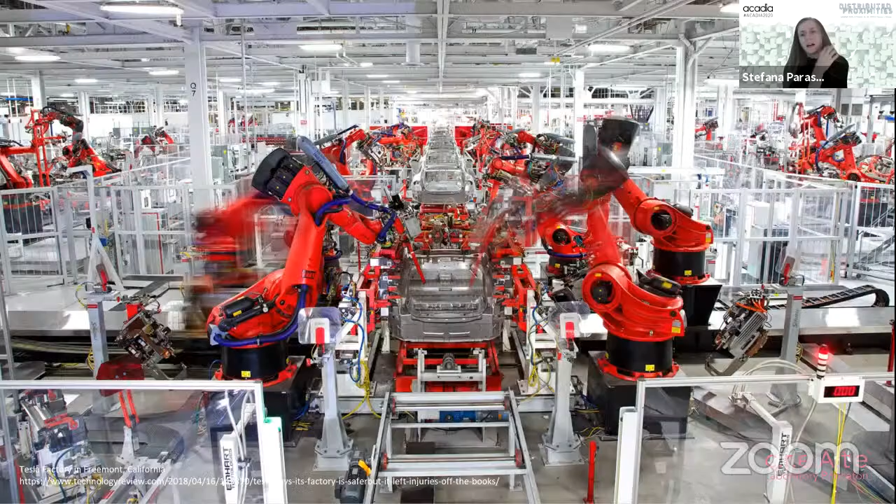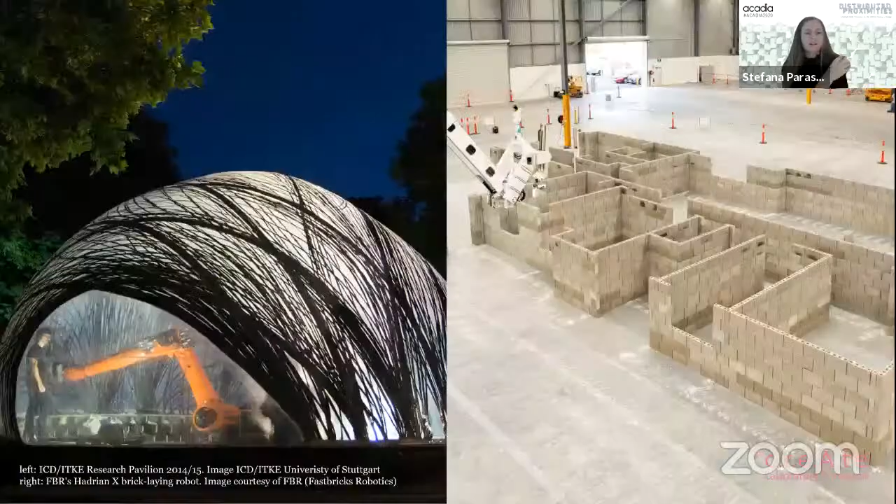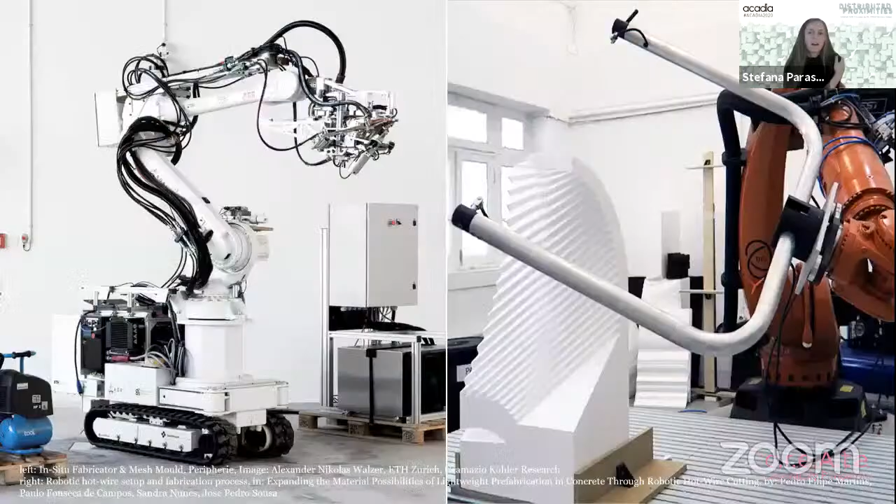Digital technologies have strongly impacted many industries, making processes more material efficient, cost efficient, and safer. However, in architecture we see quite some disparities in this digitalization process. Research is often focused on fabricating non-standard geometries, while on the other end of the spectrum, digital tools are mostly used to automate existing and standard processes, which leads the architect to assume one of two opposing roles: either becoming a specialist in a very narrow technical area, or being an end user relying on pre-existing processes and tools.

This leads to tensions even within our own discipline over the value of such technological development compared to the value of creativity and critical thinking. And while the technical architectural field may often feel closer to engineering than the humanities, I think we are in a very unique position that allows us to reflect upon the implications of technical tools in design.

But I am convinced that we can't do this without a very deep and thorough understanding of the underlying technical details. I think only by engaging with technology to the fullest and embracing the challenges of entering completely foreign disciplines are we able to advance these to benefit our own field and guide technological innovation towards what we really need, instead of relying on other fields to develop the tools we'd like to have.

I'd like to take you through about 2.5 projects of mine to showcase the types of developments that my students and I engage with from a technical perspective.

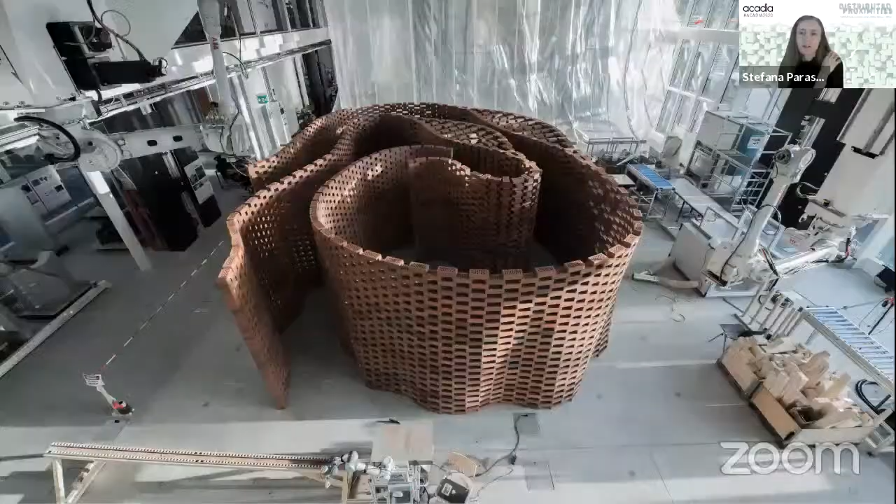The Brick Labyrinth was a teaching and research project developed together with students of the MAS DFAB at ETH during my time as a research associate there. While the focus of the project lied on building a very large brick labyrinth consisting of over 10,000 bricks with robotic arms, the true challenge was developing a structure that would work with purely dry stacked bricks, so no mortar or glue at all.

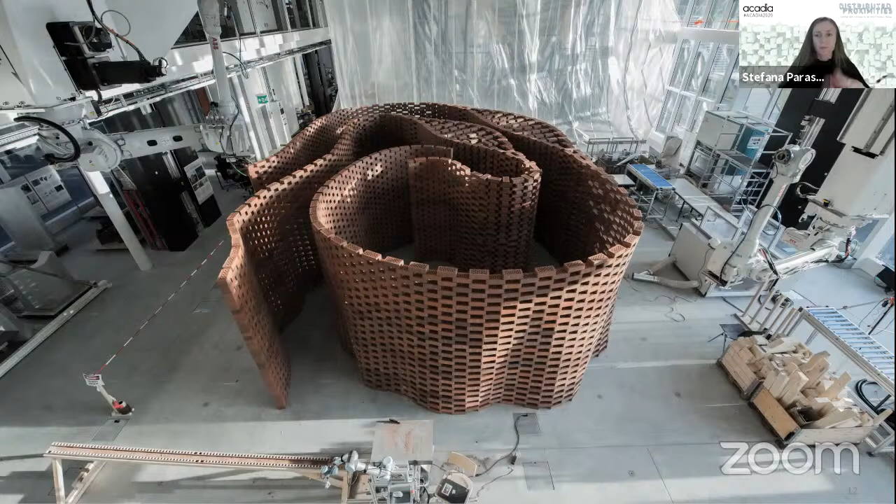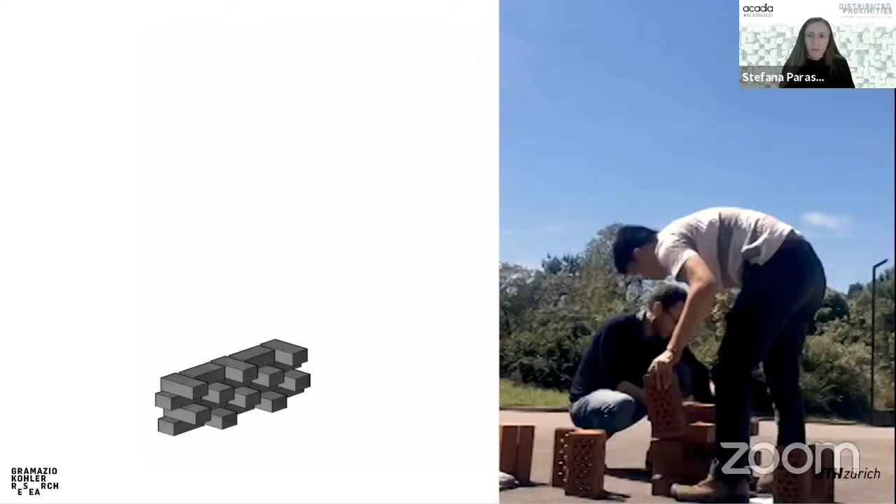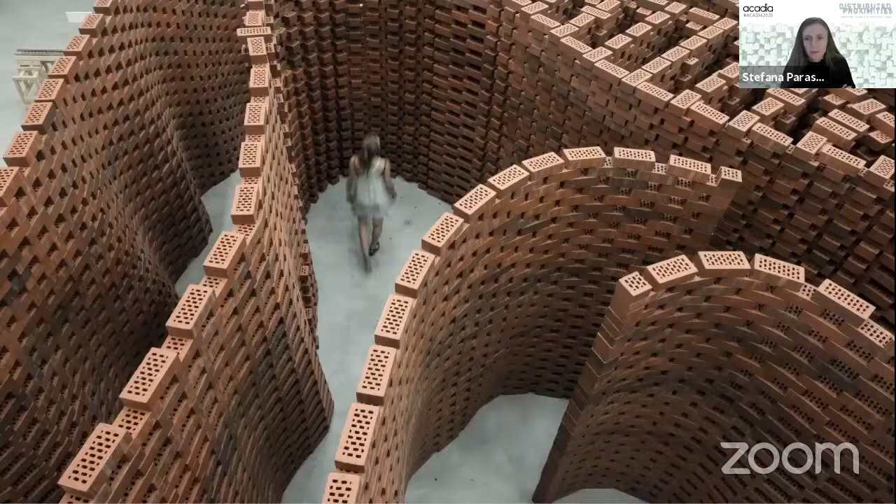In order to achieve that, we had to find ways to combine structural stability analysis with the constraints of robotic fabrication. We worked with students to develop a simple geometric stability analysis tool that we wrote from scratch, which was then validated and extended through physical tests, instead of reverting to complex, computationally heavy, black box analysis tools. This allowed us to understand how the structure behaves beyond the yes/no answer one would get from a structural analysis program.

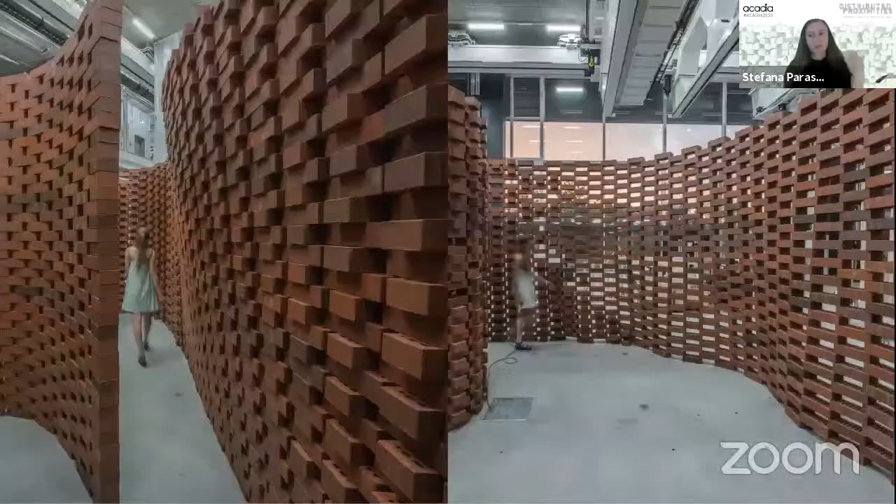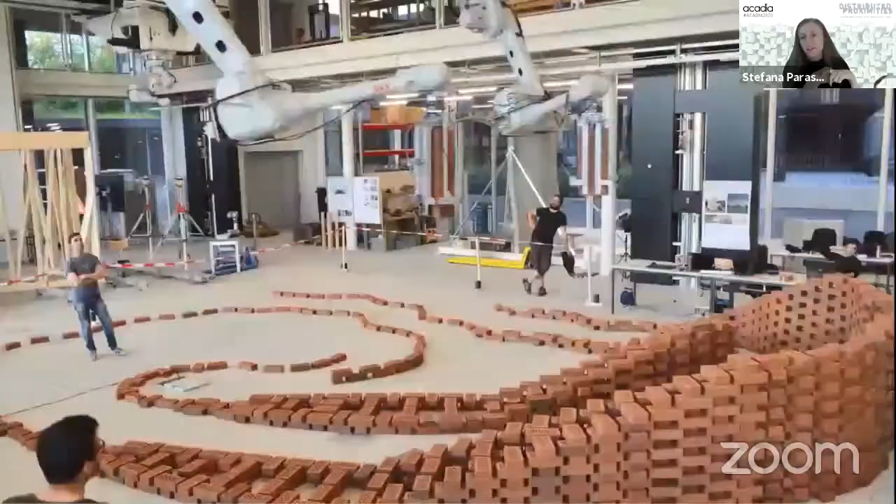At the same time, we also developed and implemented the robotic assembly process, from defining the robotic setup, designing end effector tools, sequencing logics, and path planning. We used multiple robots of different scales and sizes for different tasks. Directly developing these processes, custom control and simulation were crucial to a holistic approach of the design and fabrication problem.

Ultimately, this enabled us to construct the 3-meter tall labyrinth in less than 3 weeks, which was afterwards fully reversed into a few pallets of bricks.

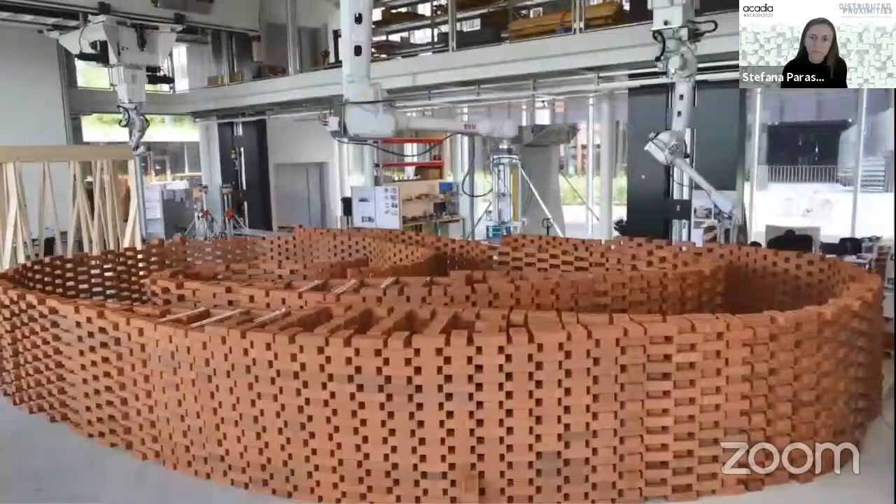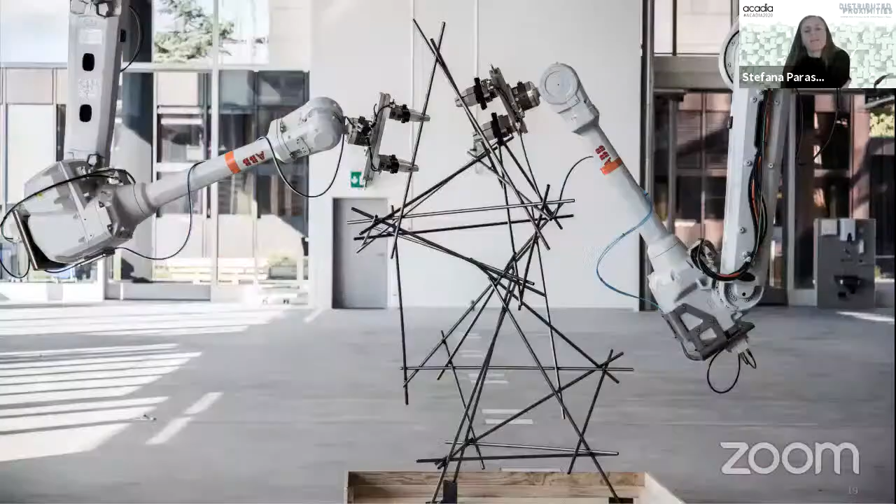In my PhD thesis, I developed cooperative robotic assembly processes for the construction of bespoke space frame-like structures, focusing on the use of multiple robots beyond the single machine that are working cooperatively, in order to open up the possibilities of robotic assembly beyond layer-based stacked structures.

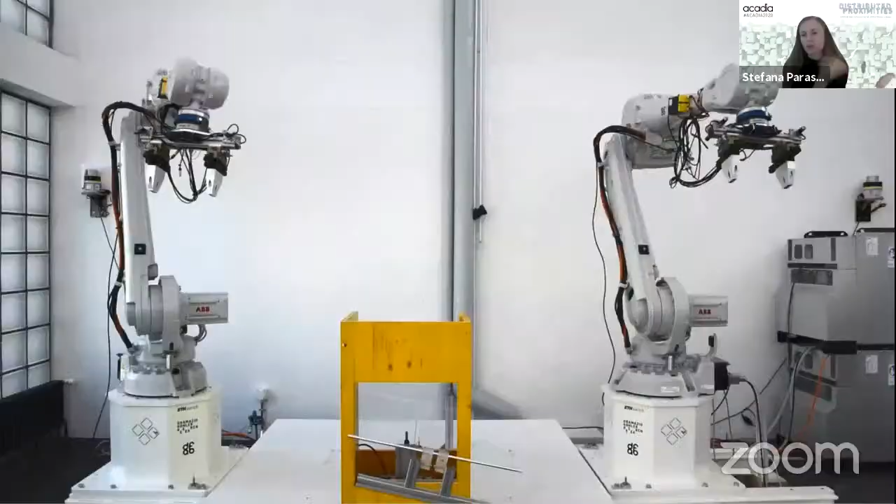The construction process works by using the robots to alternate the placement of elements so that one robot always serves as a support to the already built structure.

But the main challenge of this project was actually exposing and working with the interrelations of the very different constraints and parameters, and finding a design procedure that allowed me to explore the design space defined by the system to its fullest. This required the development of a new node system, which influenced the structure's geometry both locally and globally.

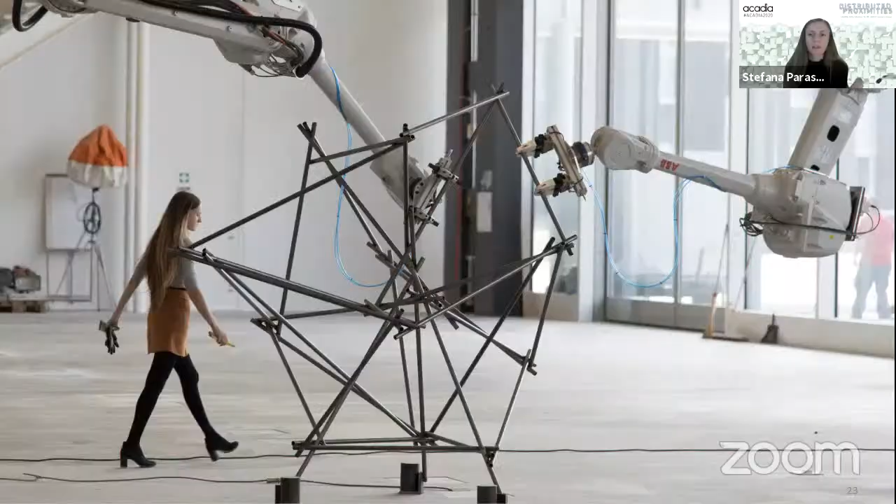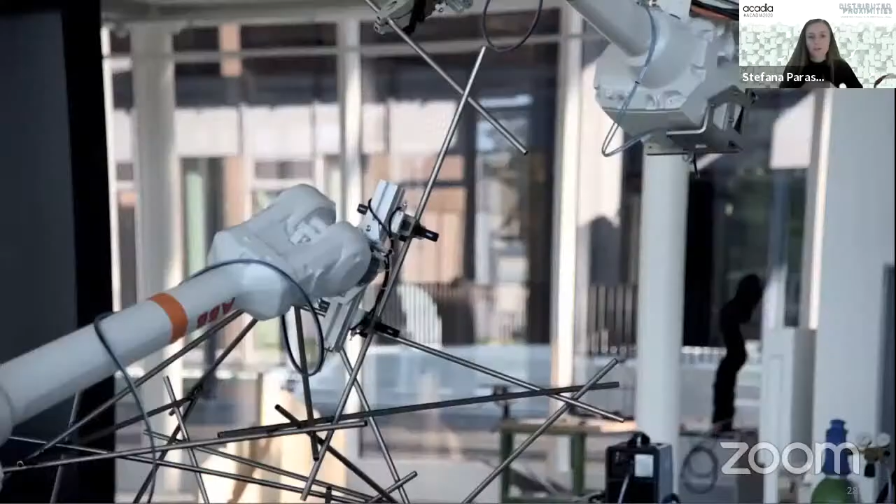It required me to find and test the material system and integrate it into the fabrication process, to understand the structural implications for the design through structural analysis and optimization, and ultimately to address the challenge of robotic movement planning in a setup with multiple machines and a constantly changing structure, which was really needed in order to find collision-free trajectories for these bars that had to be inserted into the existing structure.

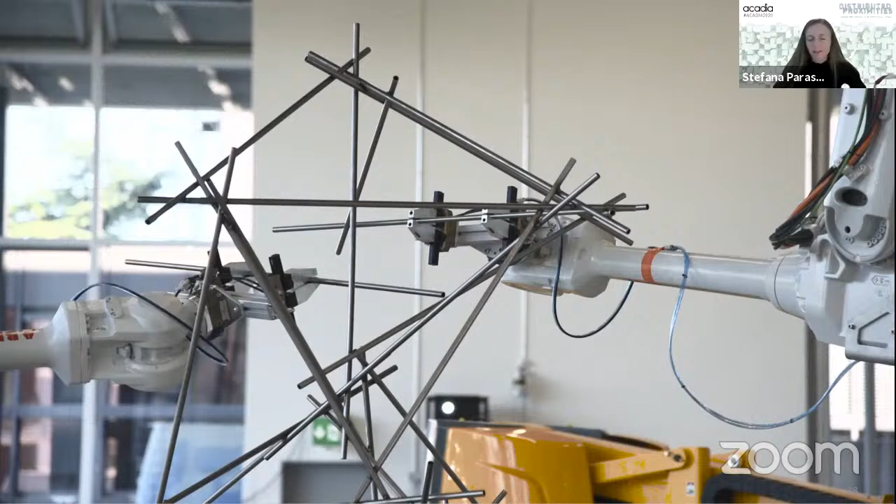Just as a side note, it's clear that robots have many degrees of freedom and can reach many positions, but they still have constraints they need to fulfill. They can't really reach any bar in any structure, so one needs to consider that when designing the structures.

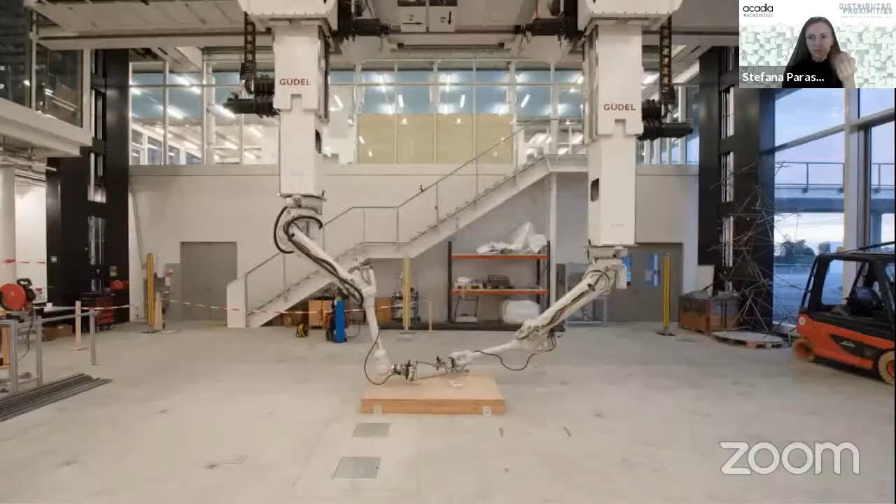All of this led to a sequential design process that utilizes both structural optimization and fabrication information as design drivers, rather than in a conventional design process as a post-processing step, which showed that engaging with every single component to the deepest level of understanding was absolutely necessary to finding solutions to such strongly interconnected parameters.

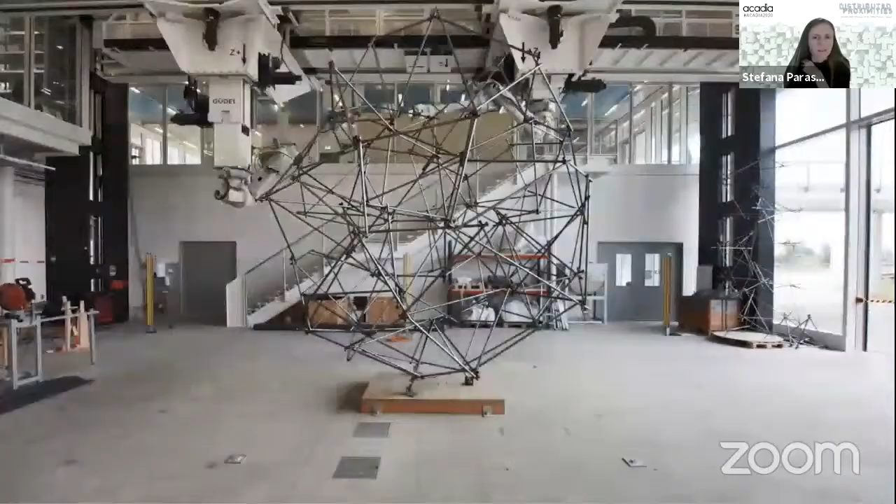And this finally enabled the construction of many large-scale structures, such as this one, which consisted of over 300 elements, I believe, enabling me to fully explore the geometric freedom resulting from these processes.

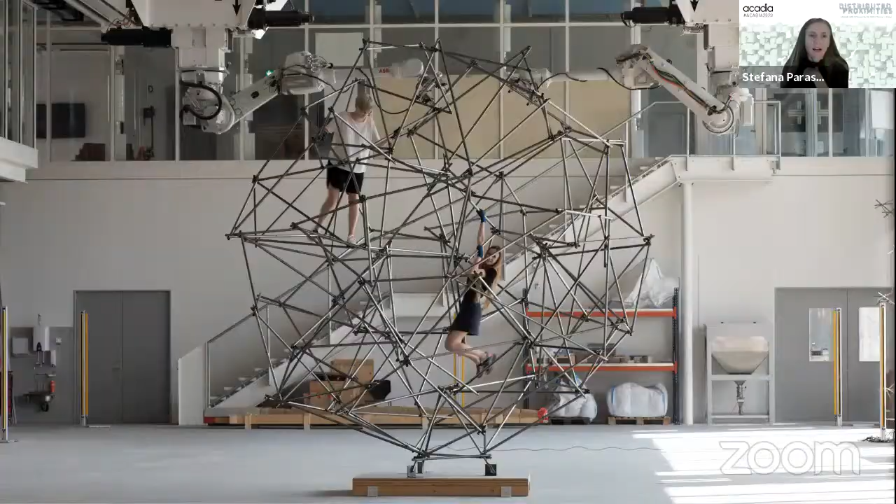I want to touch upon one more project that we recently finished at my lab in Princeton, which is a light vault in collaboration with SOM Engineering and the Form Finding Lab at Princeton. However, I don't want to give away too much from this, since two of my PhD students will present it during the paper presentation session tomorrow. So I'll give you just a quick glimpse.

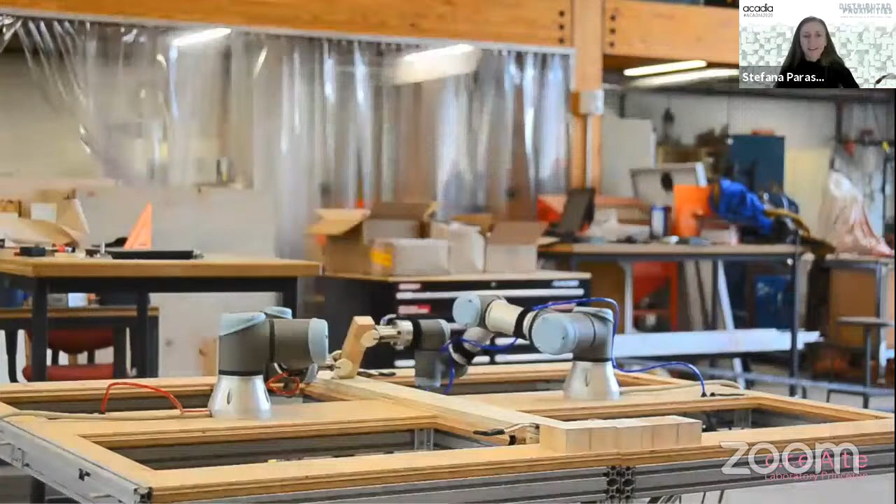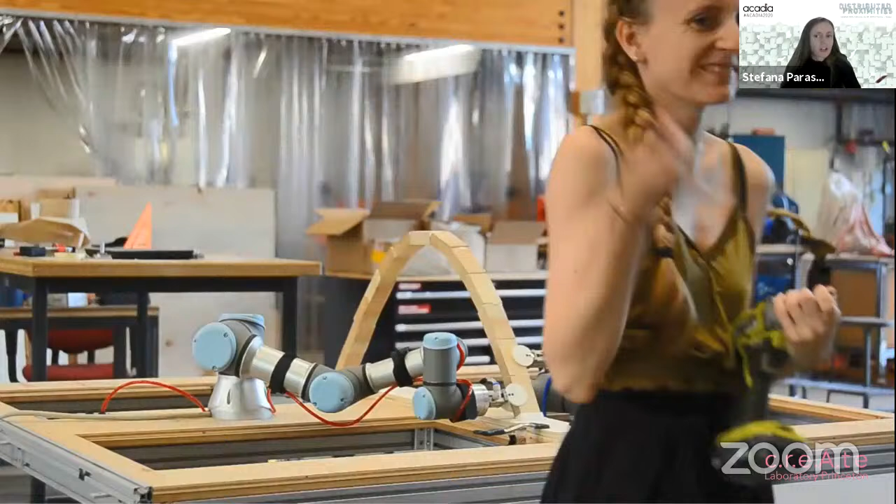I do want to point out how manifold the required knowledge for this project was. One could think that by working with specialists, in this case many very highly skilled engineers, designers don't need to confront those challenges anymore, but can focus on the process of creation. But in order to achieve an integral functional design that is both stable and buildable with robots, we as designers had to be aware and find methods to engage with all the challenges of such a construction process, from defining robotic movements, defining a sequence, a pattern, identifying the design space that fulfills both structural stability and robotic feasibility.

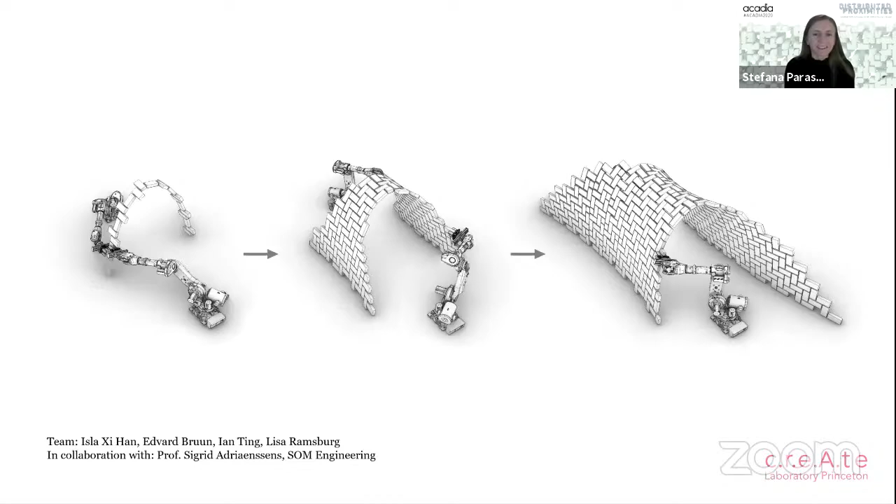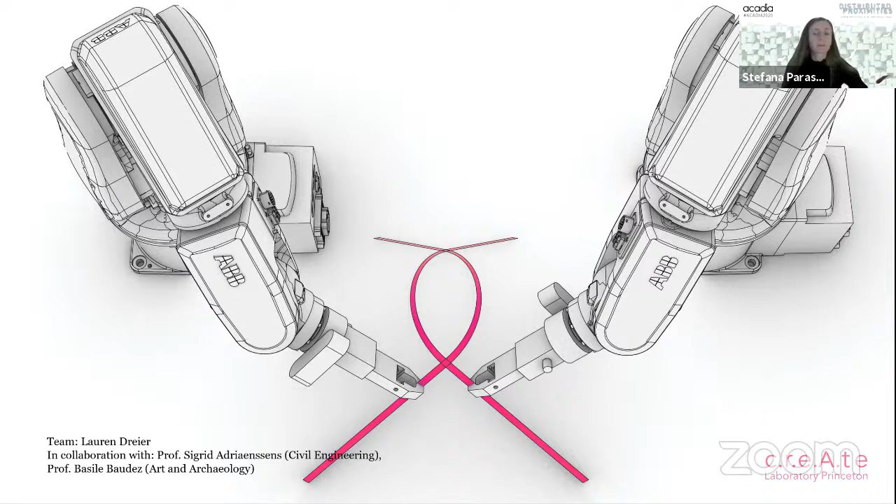To sum up, I believe that in order to truly impact our discipline, we need to dive forward into all the technical details of different fields, from structure analysis for understanding the behavior of structures during construction, through robotic kinematics and simulation for developing new robotic processes, to physical construction and testing to evaluate and advance our own systems. Only by engaging directly with the often unfamiliar and sometimes scary details of technical disciplines can we be able to adjust to the ever faster advancements of other fields, such as robotics.

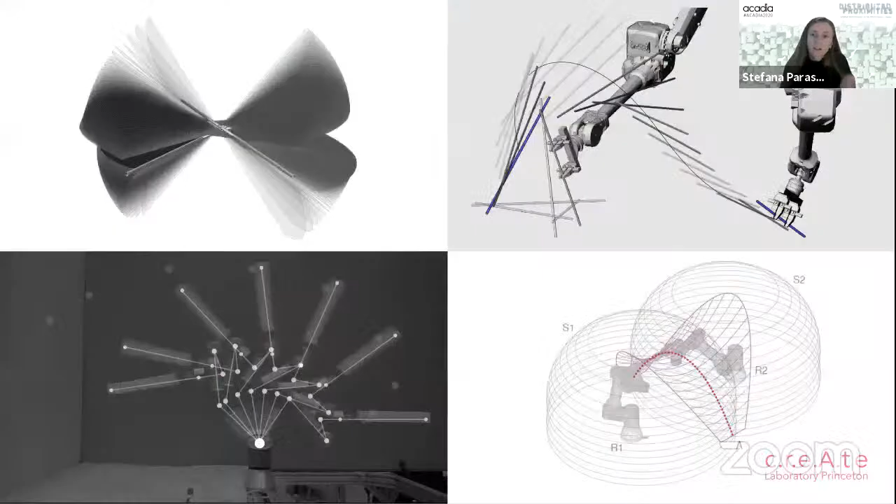And rather than handing designers ready-made one-click tools that do the work for us, I think that we should develop new types of tools that make the technical details understandable and graspable, and that allow architects to fully engage with these technologies, such as visualizing design spaces rather than visualizing a robot's movement, for example.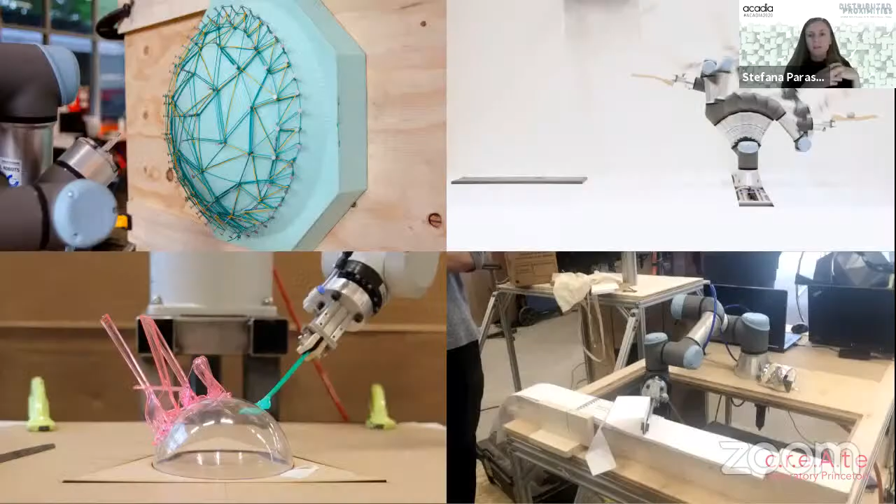Which is also what I apply in my classes, where I teach students the basics of robotics and programming to then find incredibly creative ideas transferred to reality. In this context, I think it's crucial to provide students with the technical knowledge and tools to understand how to design their own processes, rather than how to apply existing tools and processes.

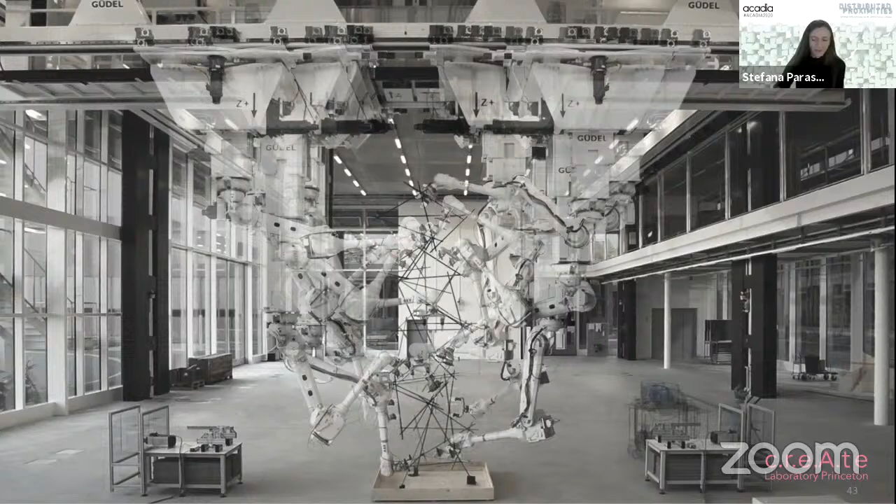Great, I think I'm up next. This is Erin.

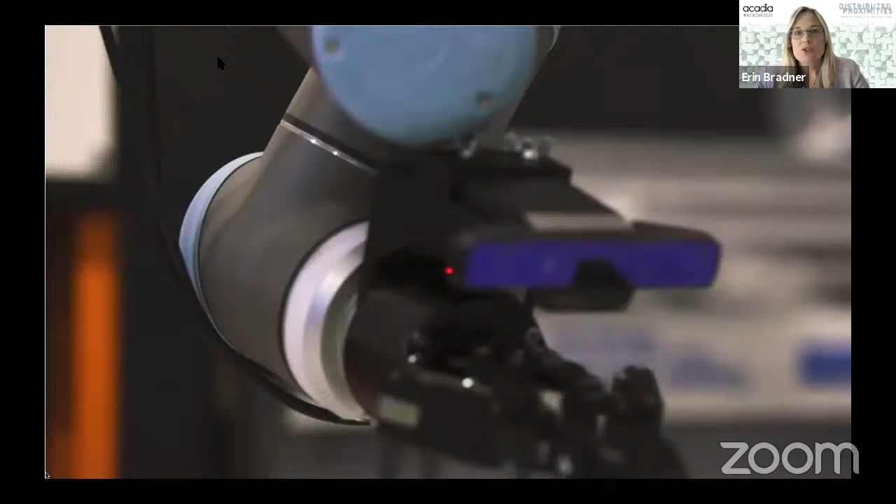First, a concrete example of how our research in machine learning is making robots inherently adaptive. In this research, we're using machine learning to assemble objects by training robots in simulated environments. Our conference theme, distributed proximities, evokes the distribution of learning across the physical and digital worlds. Researchers across the world are using machine learning to train robots on motor tasks, such as picking objects out of bins, and there are a couple ways you could do this kind of training.

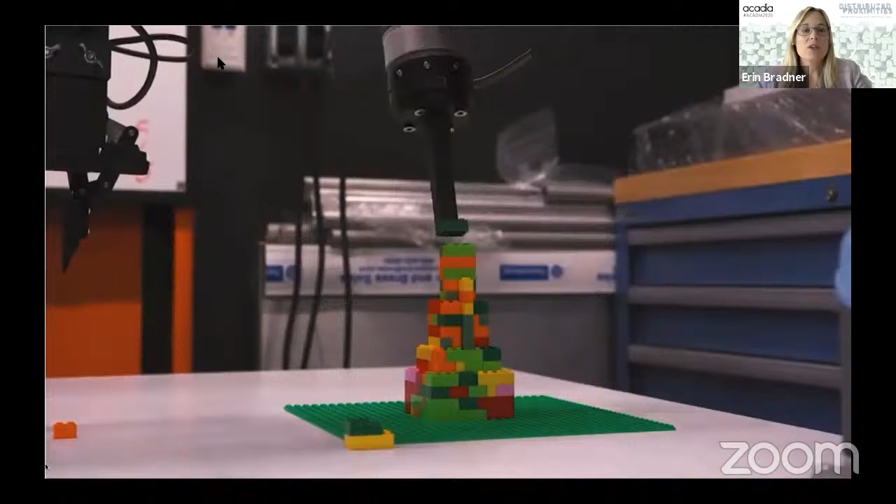You could set up a physical robot arm and record success or failure as your robot lifts, drops, and tries again to pick up objects. If all goes well, your robot learns to correct its motion after hundreds of thousands of trials. Or, you could train in a virtual world, using machine learning to train the robots to adaptively assemble objects in a simulated environment, then transfer that learning into the real world.

This is a brick tower that the robots in our lab built after learning to recognize, grasp, and position bricks, all in simulation. Here's another example of adaptive robotics, this time at construction scale.

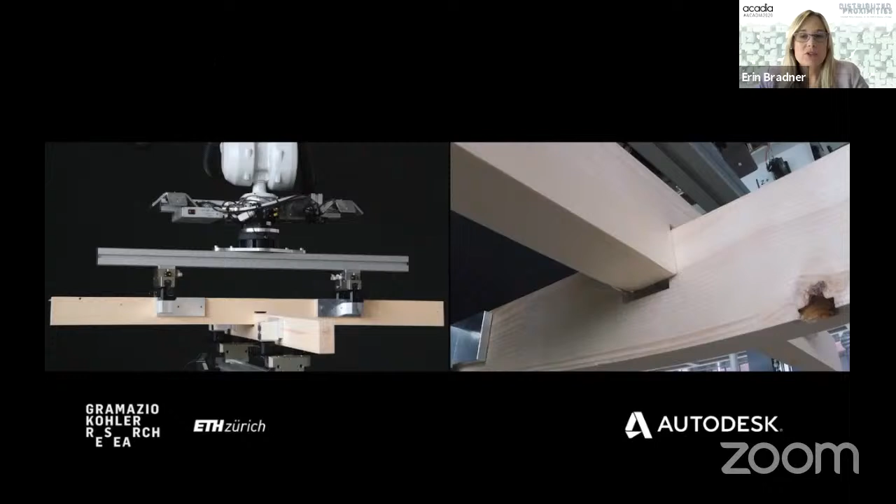Our recent research with ETH Zurich in machine-learned robot control is the first known application of reinforcement learning for robot assembly using architectural materials. This video is moving slowly, it's not just your screen. We designed a machine learning system to connect timber joints. Here you can see these joints are tight fitting. The tolerance is 1 millimeter, meaning there's some finesse required to get these pieces into place.

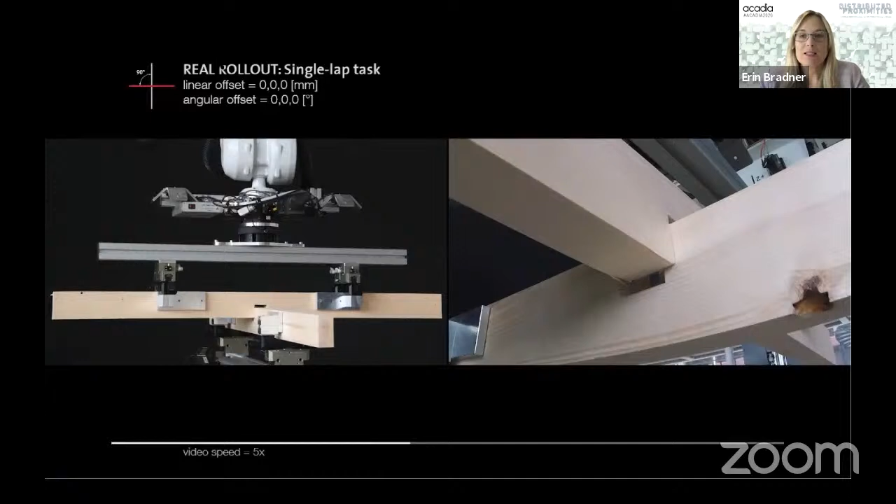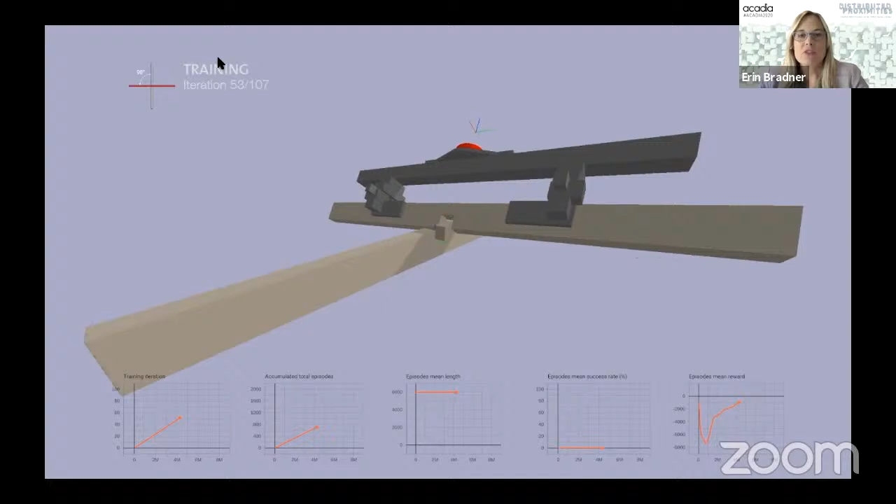A human would adapt using a sense of touch to determine how much force to apply and at what angle to apply it. So we gave our physical robot a force feedback sensor, and we replicated that sensor in a digital simulation. Again, training happened in a simulated world. Here's a video showing the digital training on a 90-degree joint.

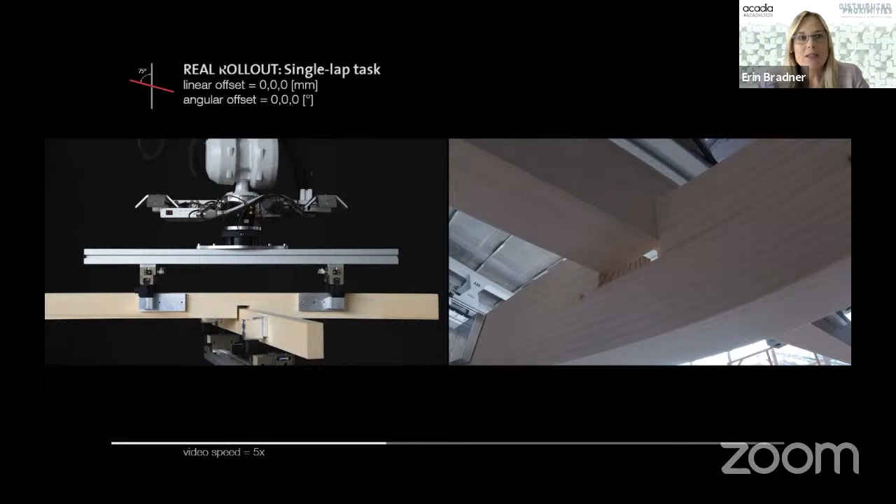The algorithm was way off at the start, but by iteration 107, it had learned how to fit the pieces together. What's remarkable here is that the robot adapted to new alignments in the real world without having encountered every alignment in the simulated world.

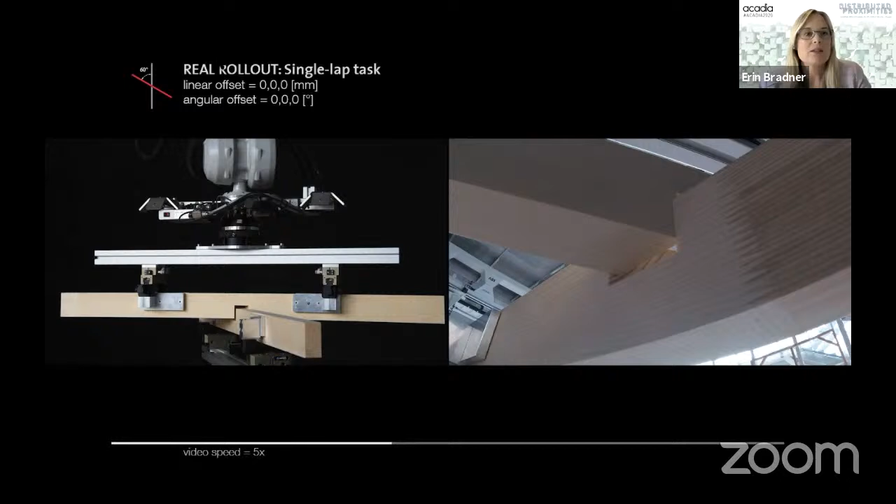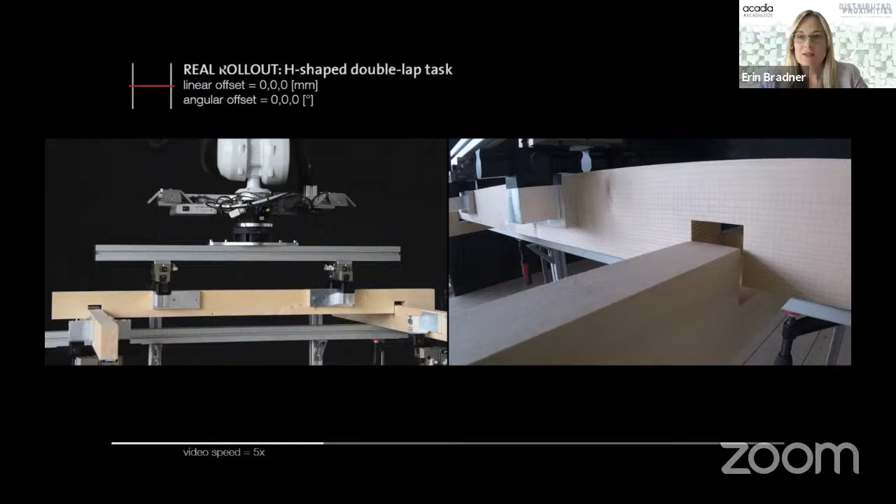Here, it's completing joints at 70 degrees, but it was only trained on 90-degree joints. The real power of this approach is that it's generalizable to joints at different angles and at multiple joints. This video really amazes me because the system wasn't trained to complete two joints at once, but it generalized its learning so that it could fit one piece of wood into two joints simultaneously.

These wood joints are just one example of the inherent adaptivity that's driving advanced robots. I should point out that the machine learning systems you saw take considerable expertise to set up. At the same time, explicitly programming robot motion is tedious and error prone. But what if you could distribute the work of programming robot motion between the creators and the robots themselves?

Now, I'm not talking about fully autonomous sentient robots here, that's part of the mythology of robots that Maria mentioned. So sorry to disappoint the sci-fi fans listening today, but what we're researching is more procedural, how to manipulate objects and automate them. One of the technologies we're developing is cooperative force feedback to allow multiple humans and/or multiple robots to respond to each other in real time.

Think of the last time you moved a heavy dresser with someone. Neither of you knew precisely where the center of balance was. You moved it successfully because you sensed how much to lift and to step based on how much it was shifting in your hands. You communicated with your partner through the dresser.

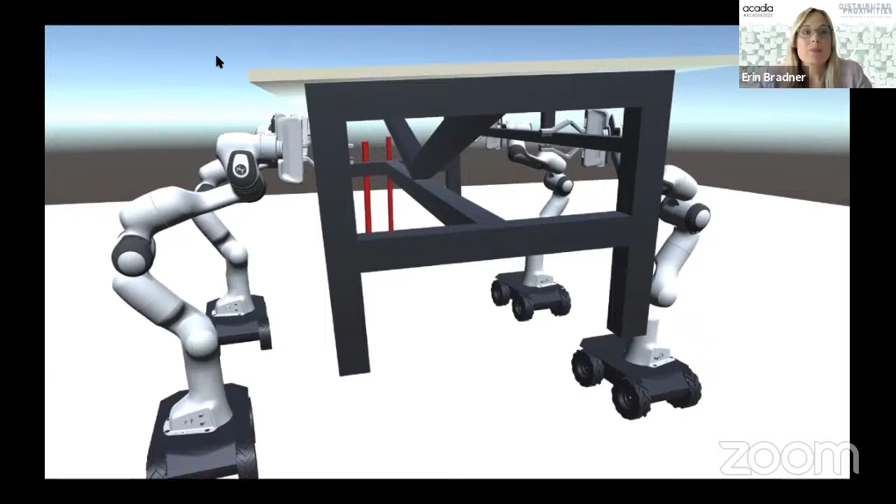In an experiment in our lab, we're doing something similar. In this simulation, you can see that the robots are using changes in location and mass of the object to derive their motion. Four robots here know nothing about each other or about the mass of the table they've been given to move. They're operating in a simulated world with physics, lifting and shifting the table together using only a sense of touch to coordinate.

Incidentally, this concept borrows from a classic theory in entomology called stigmergy, which describes the way social insects coordinate their actions by enacting changes in their environment.

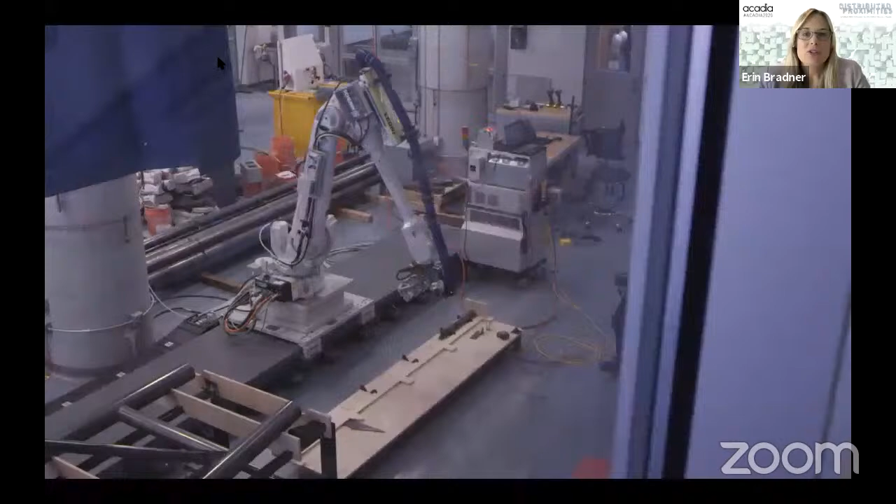Now, since we're in lockdown in San Francisco, I can't show you that system in action, but I can show you automated programming of another sort. If you were at ACADIA last year, you might recall hearing USC's Scott Mitchell share a novel approach to automating robot programming at civil engineering scale.

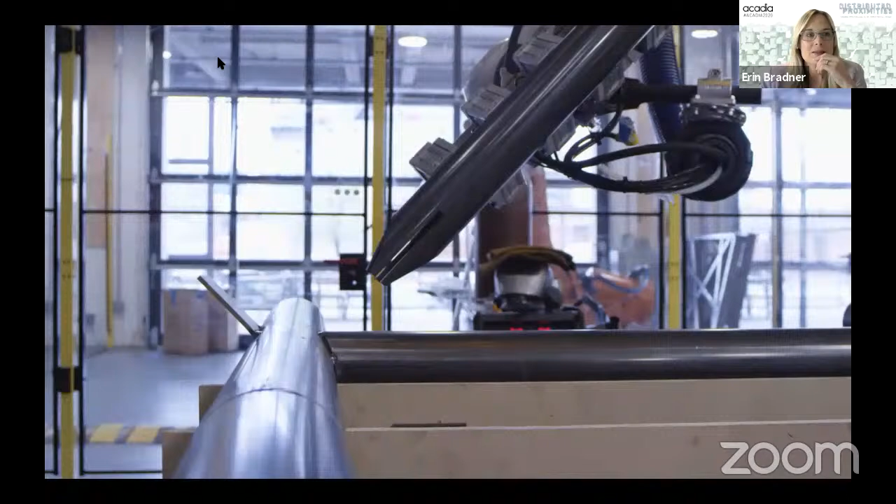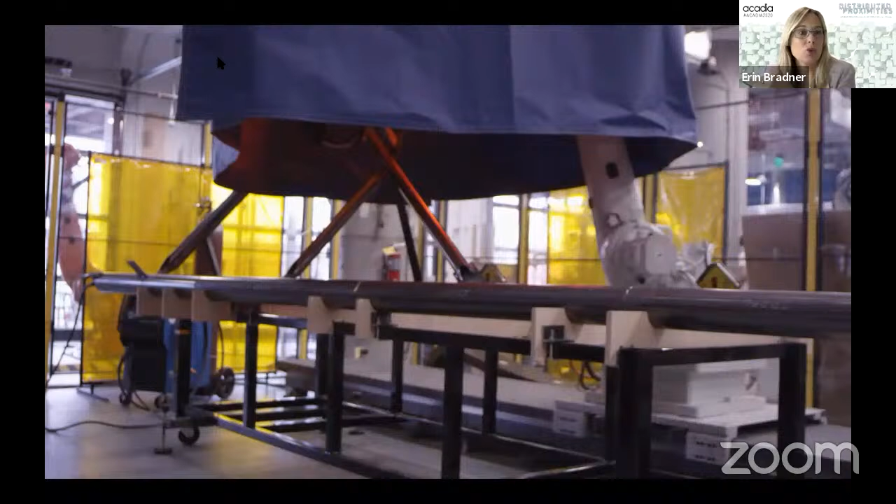In this project, what you see here is the assembly of a footbridge, an 80-foot footbridge. Here, the robot goes to the physical locations that are prescribed by the digital CAD model of the bridge and precisely positions each steel tube for subsequent welding by a human.

This is the completed physical bridge. It's not a rendering. I won't attempt to summarize the details of Scott's fabulous project, but I'll offer that it's an excellent example of automation in both design and construction. The flawless positioning of its 550 unique elements are due in large part to its digital predecessor, the computationally derived 3D model, and to the humans and robots that collaborated together on assembly in both the digital and the physical worlds.

Returning to the goal of this keynote conversation, we're exploring how robots and other industrial automation machines have been rethought for new tasks across the increasingly convergent industries of manufacturing and construction.

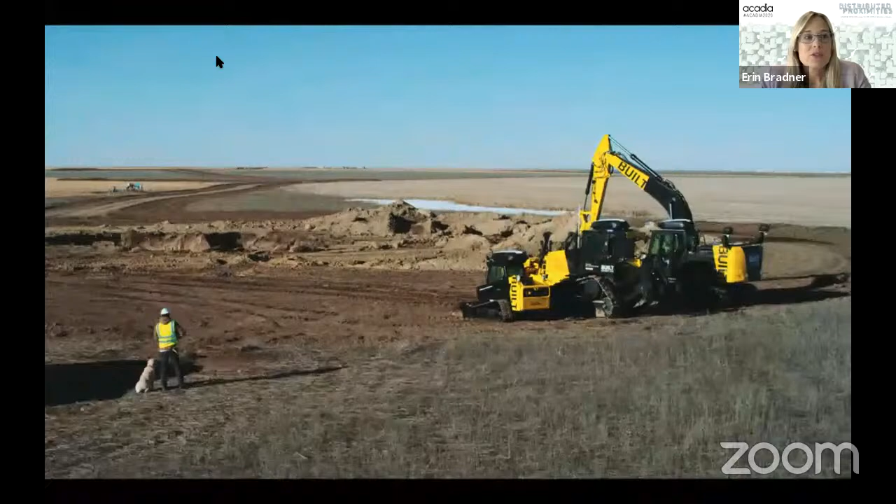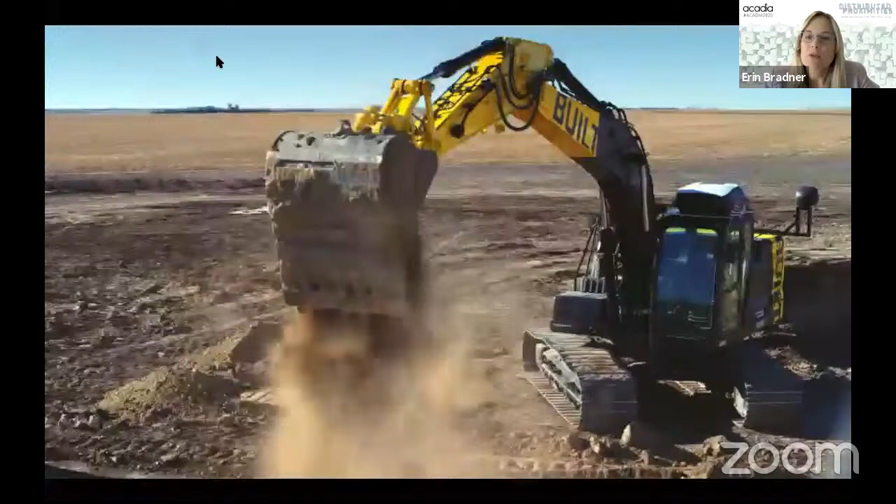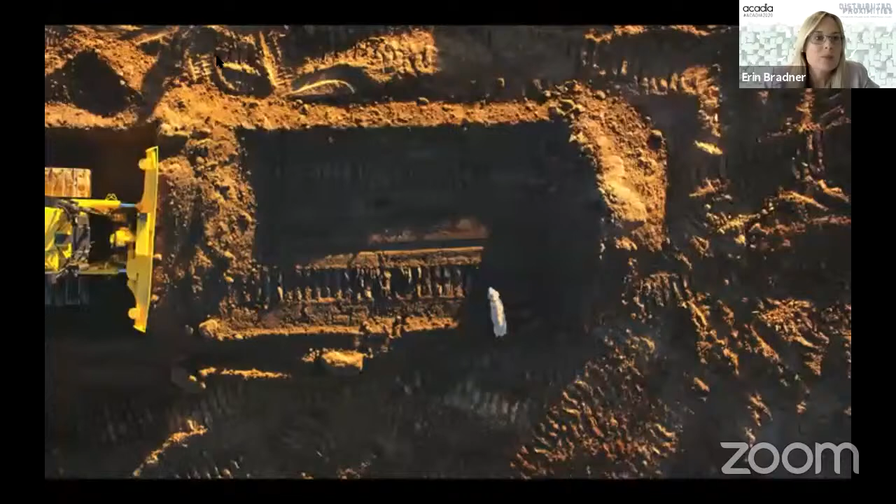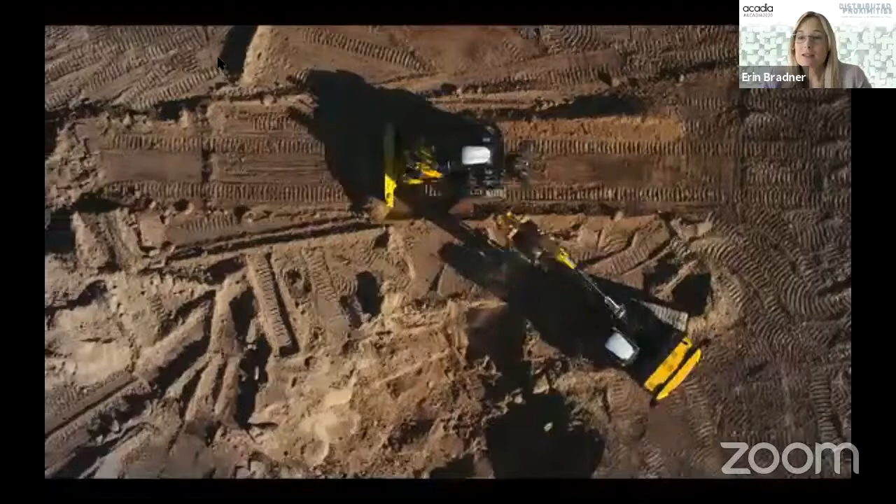So to close, I leave you with this video. I should say here that neither Autodesk nor I are affiliated with the company that produced it, Built Robotics. I'm sharing it because I believe it colorfully illustrates both the inherent adaptivity and the automated programming that I spoke of today. Yes, these robots are operating in what might be classified as a quasi-controlled environment, but they're also sensor-rich, mutually aware, and presumably connected. See, they stopped while that dog was crossing its path. My hope is that this video provides a commercially available counterpoint to the experimental work I've shared in this keynote, squarely targeted to the practitioners of today whose work is being reshaped by robotics and automation. And it looks as if, thanks to his robots, this construction worker gets to go home early.

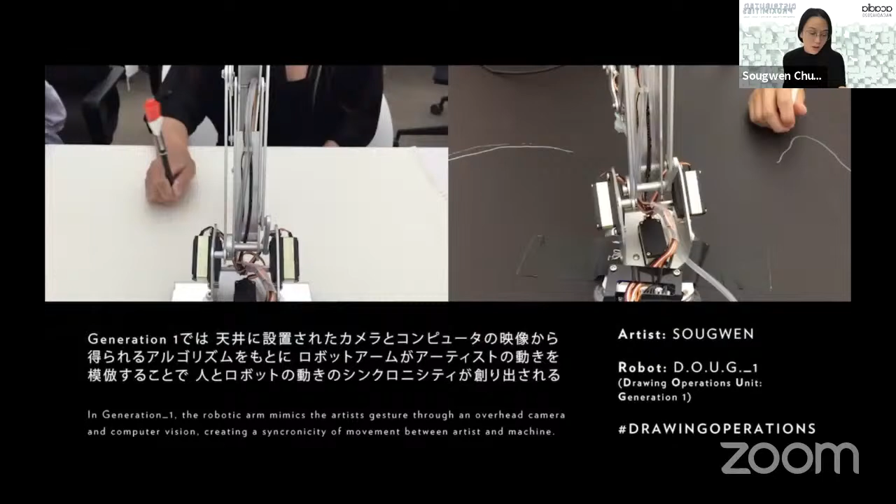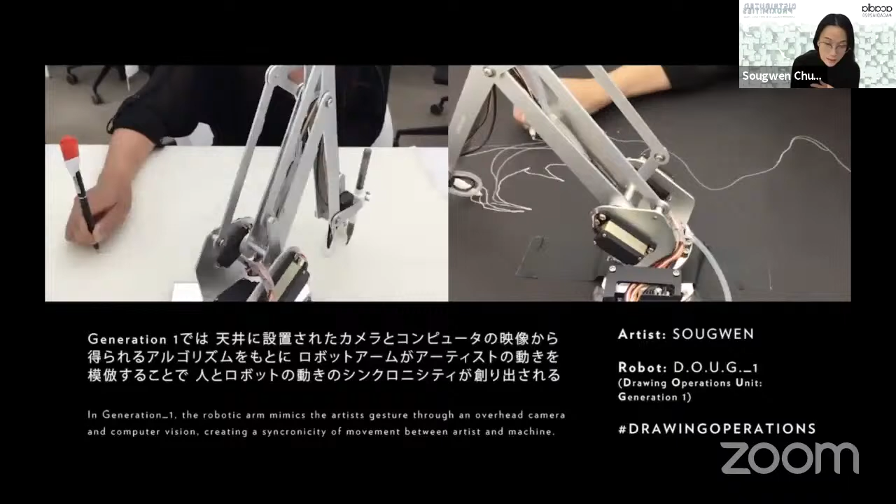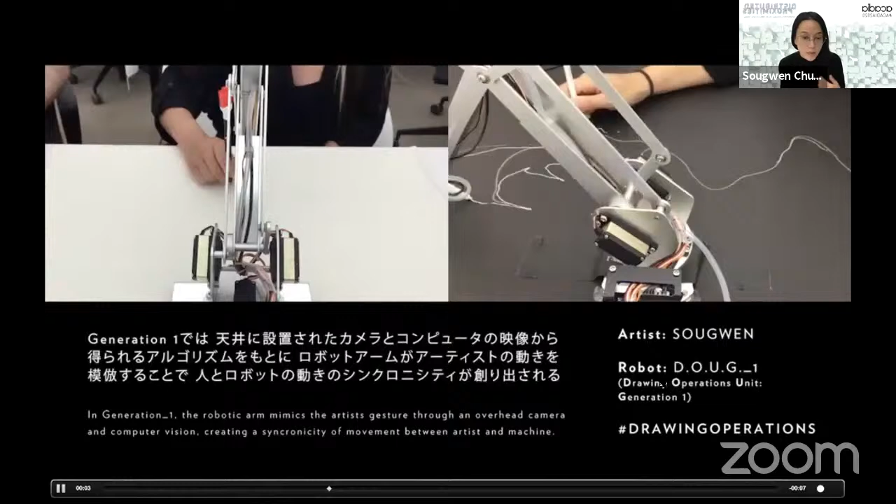So it started with Drawing Operations Unit Generation 1, which used a simple computer vision algorithm to track the position of my pen in real time to create a mark on canvas through the mechanical unit. I deliberately chose this rudimentary approach because it allowed me to see what was really beautiful and vital about the drawn gesture and the co-creative process alongside machines—not the perfection of its execution, but actually the beauty in imperfection. So Drawing Operations Unit Generation 1 really changed the nature of what I thought of as my drawing practice at the time.

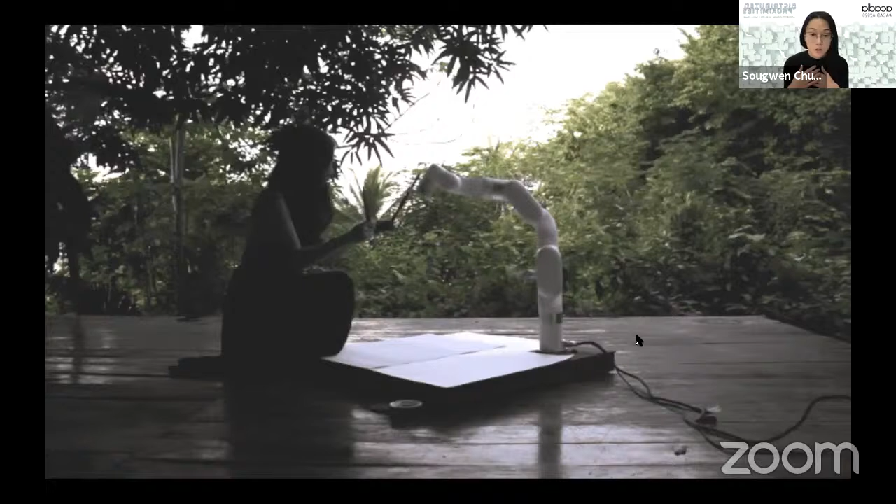For me, what I've learned through this project, Drawing Operations, is that it signaled a certain shift in thinking about machines beyond automation, but towards facilitating a new type of communication and a new way of knowing and understanding and experiencing something like drawing and art practice that expanded the human sensory apparatus to include the non-human as collaborators. So I found it much closer to the Chinese translation of the word computer, which is electric brain, Diannao.

Through all this, it's been part of this journey of thinking about machines, not only as tools for automation or potential electric brains, but as abstractions of human intent that can catalyze new forms of knowing, thinking, and making. This is a bit in response to, and with some criticism of, slogans like 'make the AI do it' and these perspectives that are rather cheeky and simplistic, but generally harmless.

I think phrases like 'making the AI do it' describe what my colleague Seth Kamvar calls self-reinforcing technologies versus self-limiting technologies. My hope is that through this ongoing process, technologies can kickstart a human process by creating technologies whose use doesn't lead to more use, but creates technologies that change the type of use it's participating in. So in this way, creating processes with robots that help catalyze new approaches, connections, modes of understanding, but aren't dependent on it, that don't atrophy physical processes in service of computational ones.

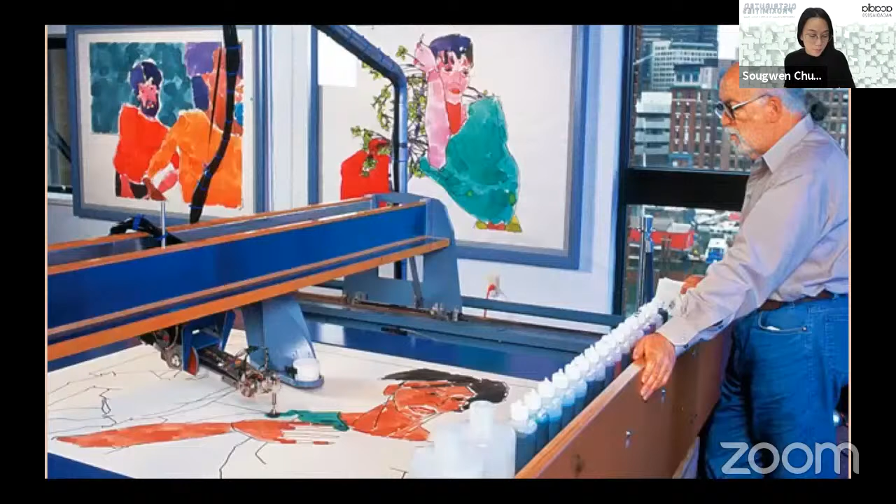And not to say that that can't be fun. I think an art historical precedent for this work is Harold Cohen's Aaron project, who wrote his seminal painting program called Aaron in the 1970s. As you see here, Cohen stands back from the frame as the plotter executes his outputs as a painting artifact. I think this is representative of how we culturally regarded technology then, as something distinct from the human.

But for me, that takes out part of the fun of working with machines, which is drawing with it, the drawing portion itself. As an artist, I'm interested in evolving my drawing practice to experience new ontological and epistemological processes, and not let machines have all the fun, and to think about these interdependencies through this lens, to think about it as interdependence and not codependence.

So I started calling this a framework of human and machine collaboration, because as we know, the best collaborations are interdependent and not codependent, with all participants bringing something valuable to the table, or in my case, the canvas.

So in Drawing Operations Unit Generation 2, I was in search again of the beauty of a non-human move, and I wanted to create a drawing collaborator, a series of drawing operations based on drawing throughout the course of my life. Back then, I painstakingly collected as many of my own drawings as I could find, finished works and unfinished experiments, freeform sketches, to tag for the AI system. Since I've been drawing for over two decades as an artist, it took a really long time, and it actually taught me a little bit about some of the labor that goes into training a neural net.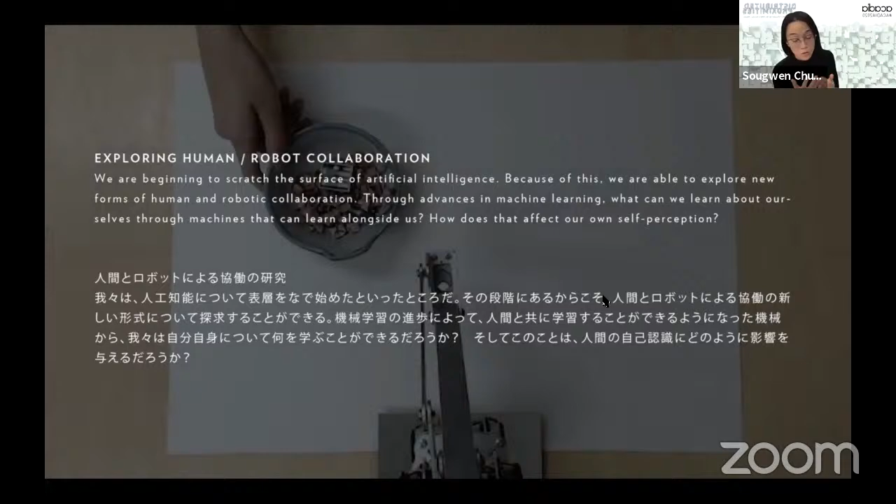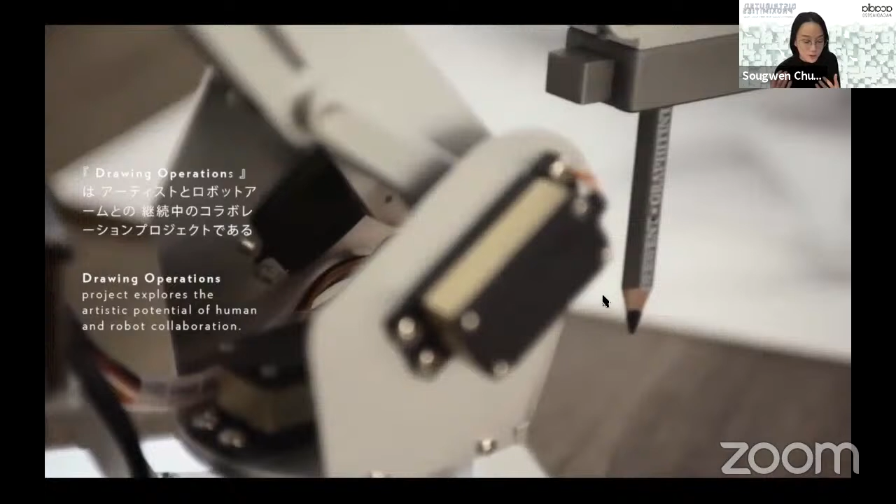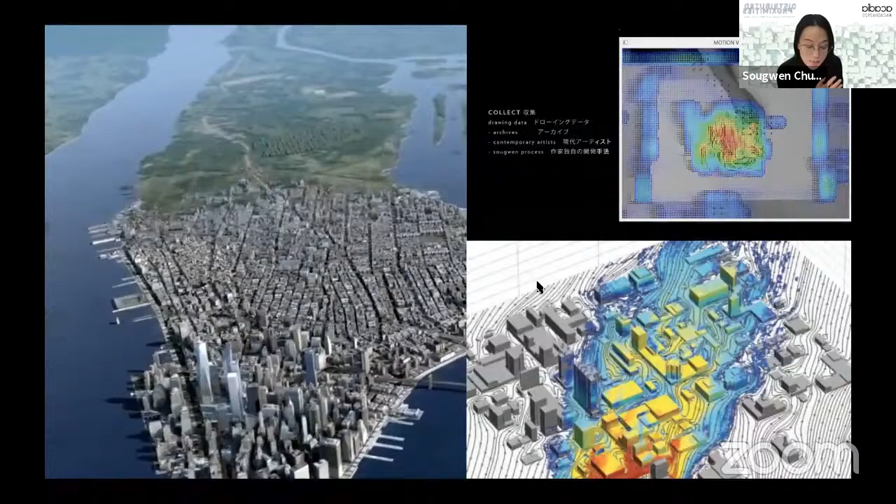So for the third generation of Drawing Operations, I became really interested in experimenting with crowd data through a multimodal robotic system linked to the flow of New York City extracted from public cameras. My intention with this project was to communicate a new form of landscape painting.

At the time, I was thinking about techniques of vision, the ways in which single object detection differs from optical flow recognition, and how the machine views a crowd and how that unfolds in society. The computer vision engineer I worked with had a background in fingerprinting technology, and talked about his desire to create a vision algorithm that privileged a person's privacy and viewed them as parts of movement in a scene.

The system that I developed was one that not only traced the optical flow extracted from crowd data, but ended up rendering what I thought of as like a moving impressionist painting. I really wanted to capture that within canvas, and this is part of an ongoing project as well.

These are just three quick generations of this multi-generational project.

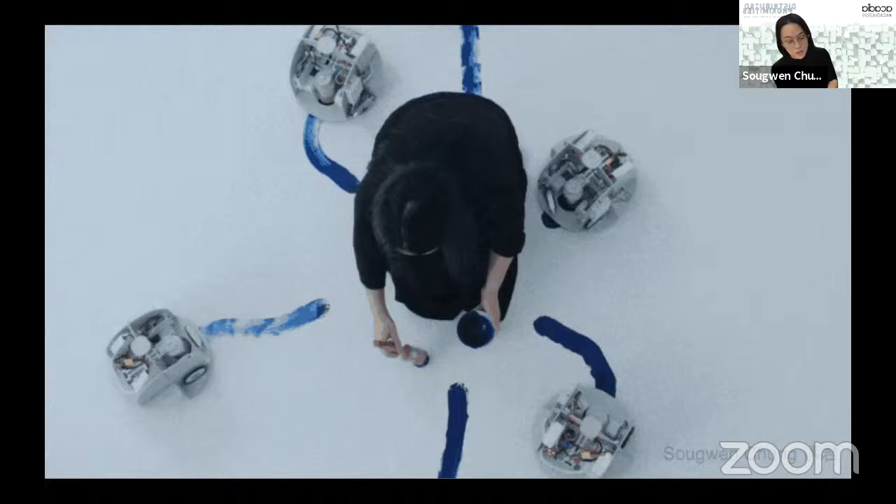In the artifacts I've produced, I've often wondered where my line ends and the robot's line begins. When it's connected to the path data from public cameras, it becomes even more interesting. If there's anything these advances in synthetic sensing technology have shown me, it's been part of a certain Copernican trauma—this recognition that the self is not at the center of the process, that we're all interconnected. That becomes a really profound decentering of the human subject.

I think particularly this year, the extent of our interdependency is a really major point of contention but also transformation—emotionally, socially, technologically, and microbially. That's sort of my rant about the collaborations I've done to date. I'm really excited to hear what the rest of the panelists have to say about it. Thank you.

All right. I think I'm up next, and here we go.

First, I'd like to thank the organizers of this keynote, Adam, Shelby, and Maria, for this invitation, and also my co-panelists for their incredible presentations so far. I'd also like to note that I'm giving this talk from Philadelphia, which is the ancestral home of the Lenape people, who have lived here as caretakers of the Delaware River watershed for thousands of years.